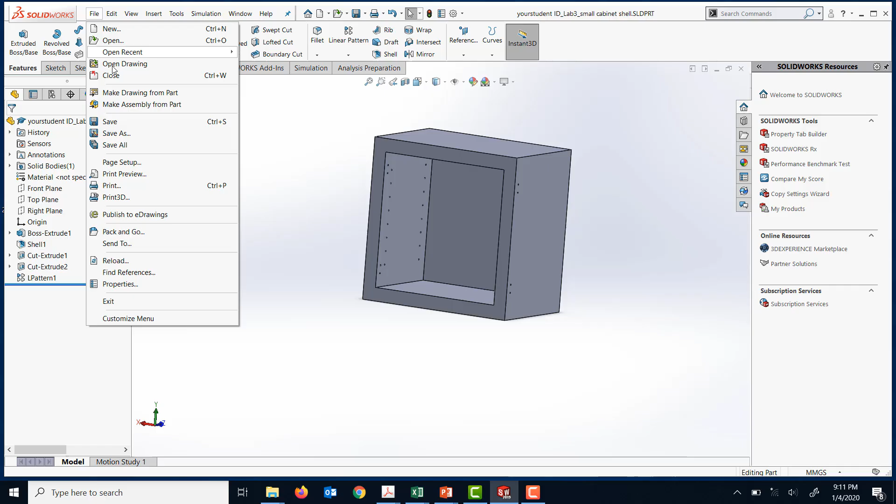Okay, now I will start working on your cabinet shelf support. To do that, I'm going to save this file first, then open up a new document part, set the units as mmgs, and save this part. I'm going to name this part cabinet shelf support.

Okay, so I'm gonna create this part. I'm gonna start again with the top plane, look normal to it by right clicking on it, click on sketch, and draw a sketch slightly different this time. I'm gonna use one of the corner rectangle tools and go into this direction.

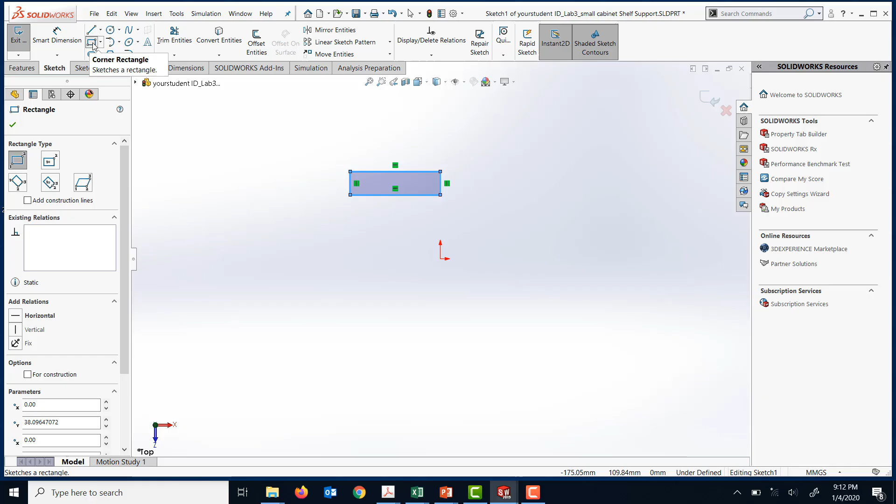Now what I'm gonna do is draw another rectangle right here, and use this trim entities, the power trim. I'm gonna click here and drag my mouse over here, and cut that from that.

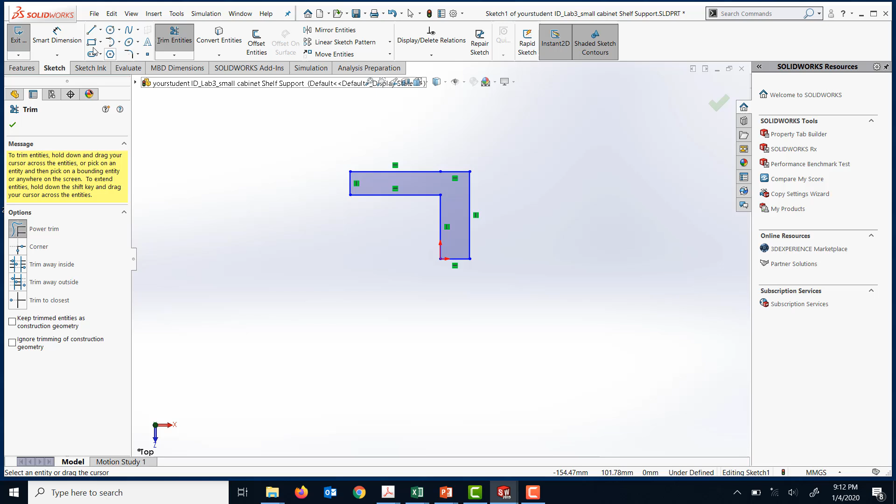Now I'm gonna add the dimensions. So this length I'm gonna set as 20, and this one as 5, this one is 5.

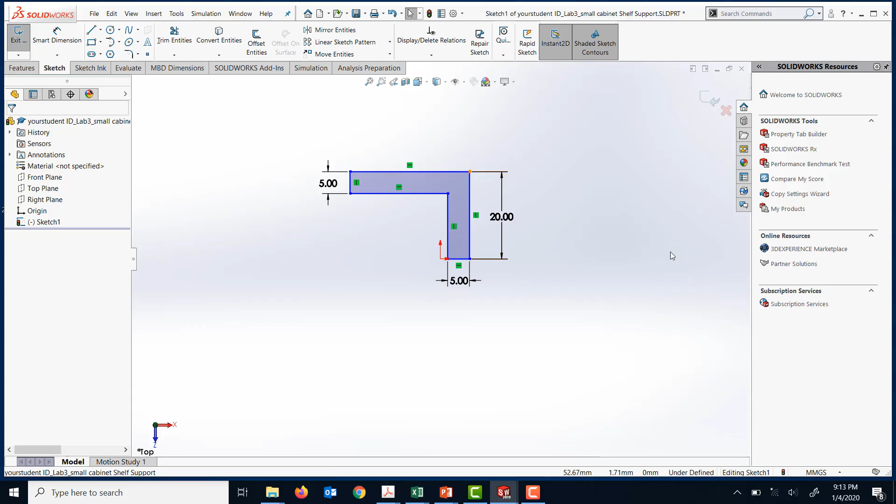What I'm gonna do is trim this one from there, and drag this point and make it coincident with that other existing point there. And now I'm gonna add the dimension there.

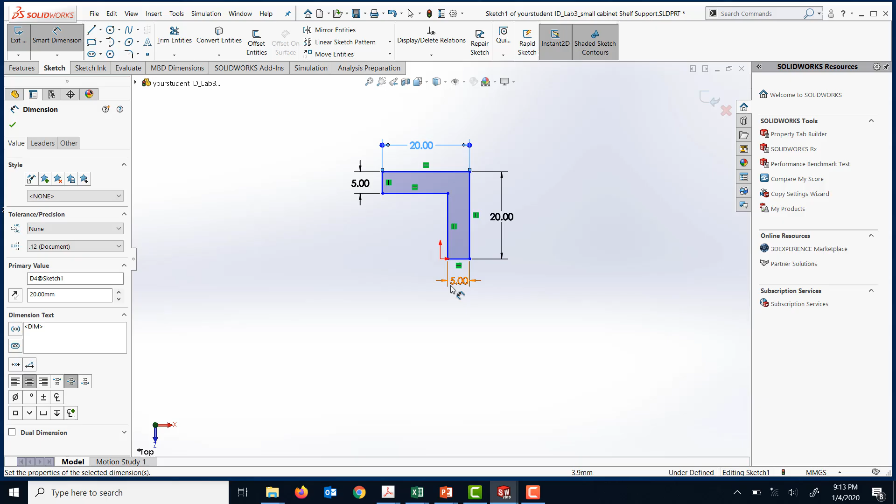This is 20, and one thing I'm gonna do is shift this point and just drag it there. So as soon as I have done it, it made this point coincident, and my sketch is fully defined. These are the dimensions that I need for that part.

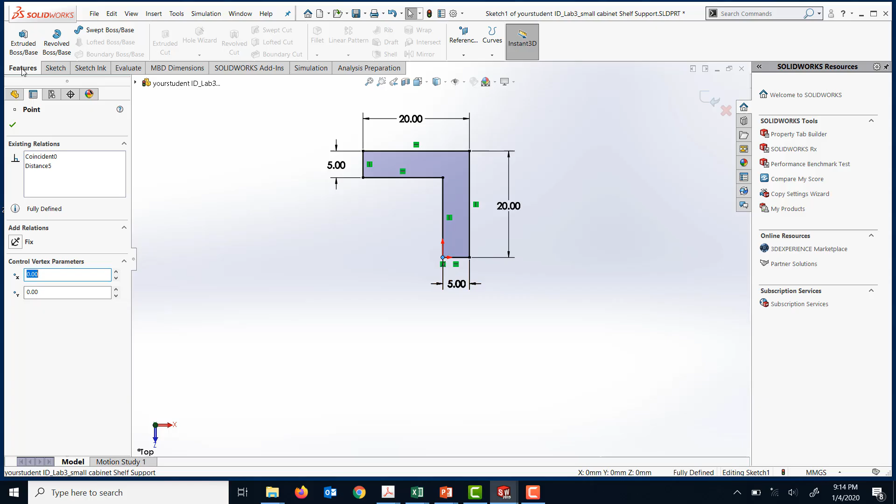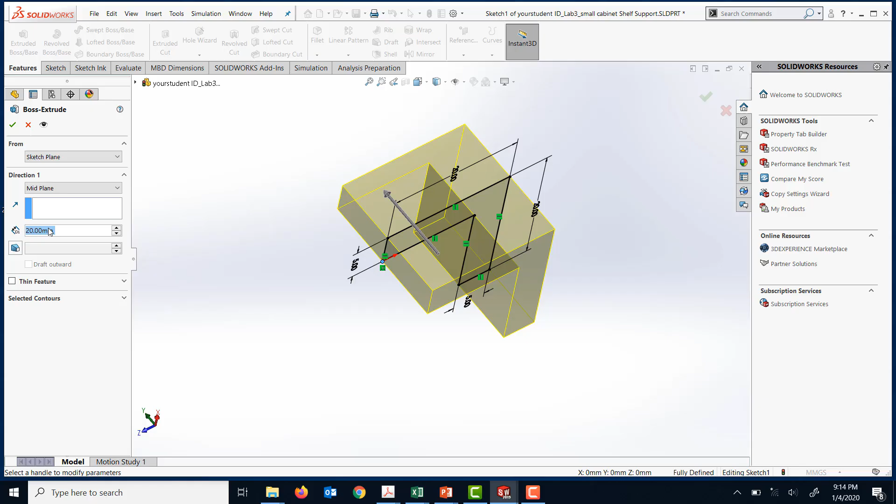And now I'm gonna go to Feature tab and do the extrusion for that. As far as the extrusion is concerned, I'm gonna do it mid-plane this time, and set the depth equal to 20 millimeters, and click OK.

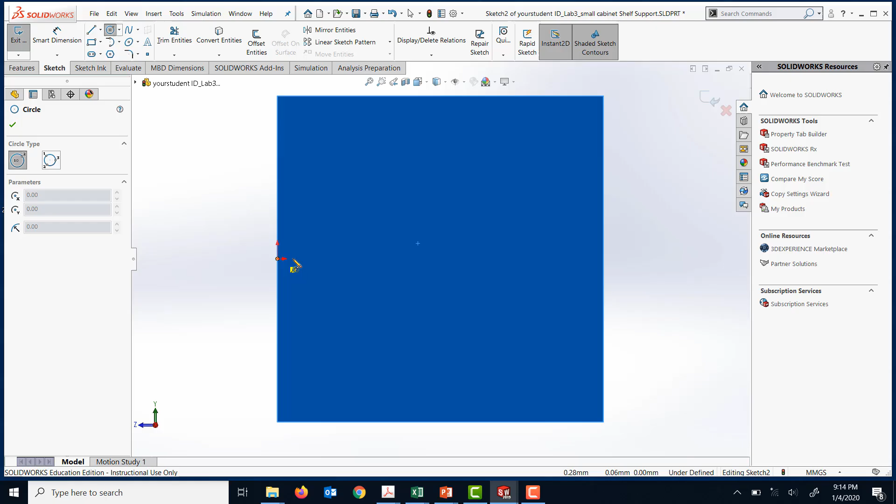So this is done. Now what I'm gonna do is add a sketch on the top of the surface. I'm gonna right click, look normal to it, go to Sketch tab, and draw a circle there, trying to come right in the middle.

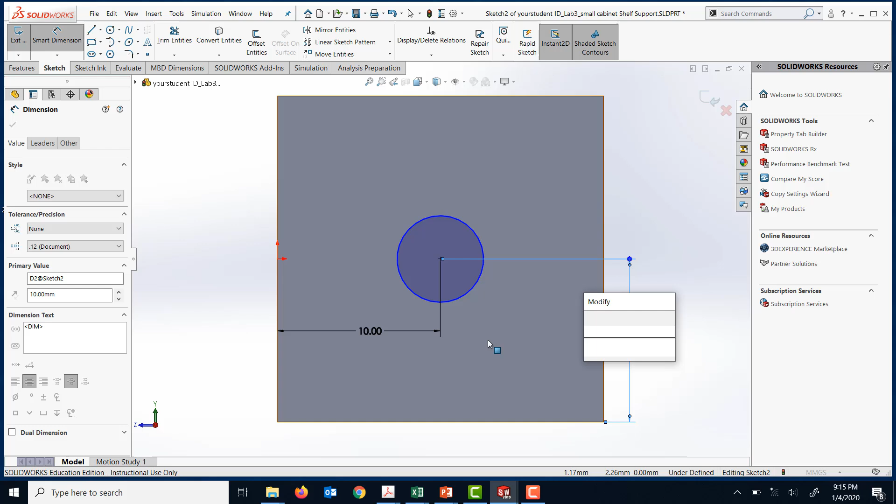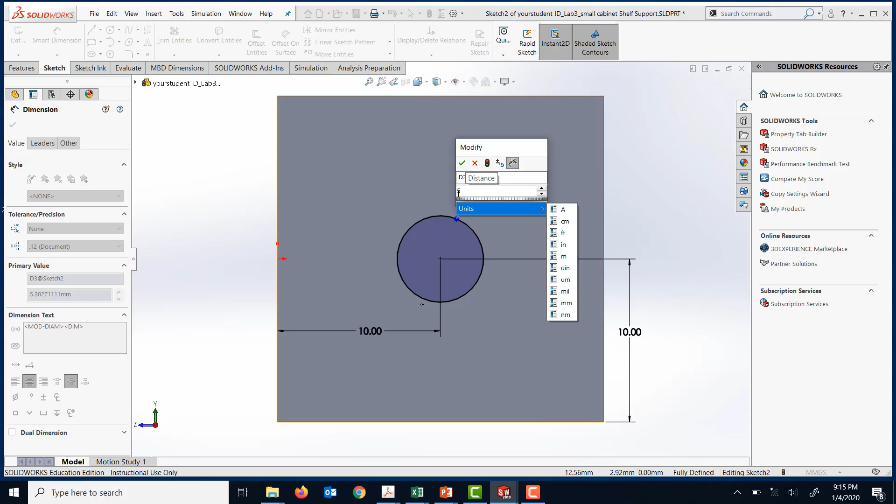I'm gonna drop this one there and start adding the dimensions. The dimension from this point to this one is 10, and from the center point to that one is 10, and the diameter for this part is 5 millimeters. I have created my sketch, and I'm gonna click OK for the dimensions. My sketch is fully defined.

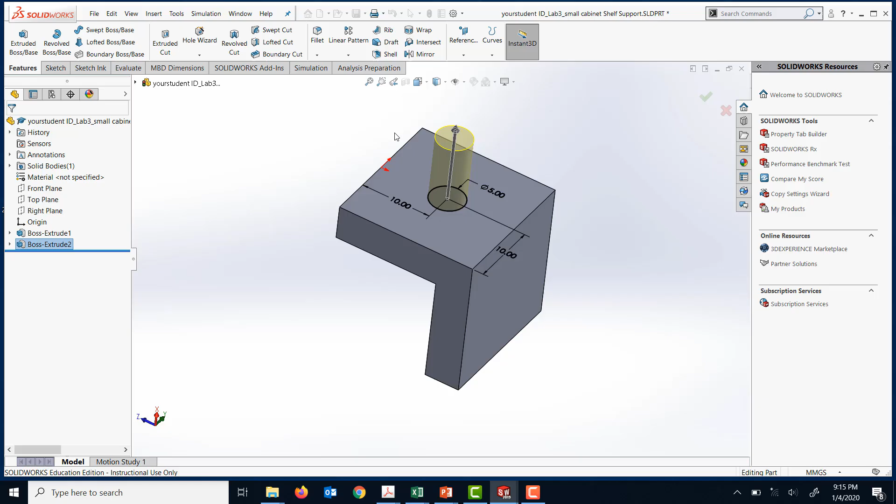I'm gonna go to Feature and extrude it by 10 millimeters. And that is done. Now I'm gonna add a fillet on this edge.

I'm gonna round it. To do that, I'm gonna go to Feature tab and click on this fillet tool icon, and select this edge, then enter the radius for that fillet equal to 2. As soon as I change it, it will show the preview with the 10 because it's bigger than the diameter, so it won't be able to round off that. And I'm gonna click OK.

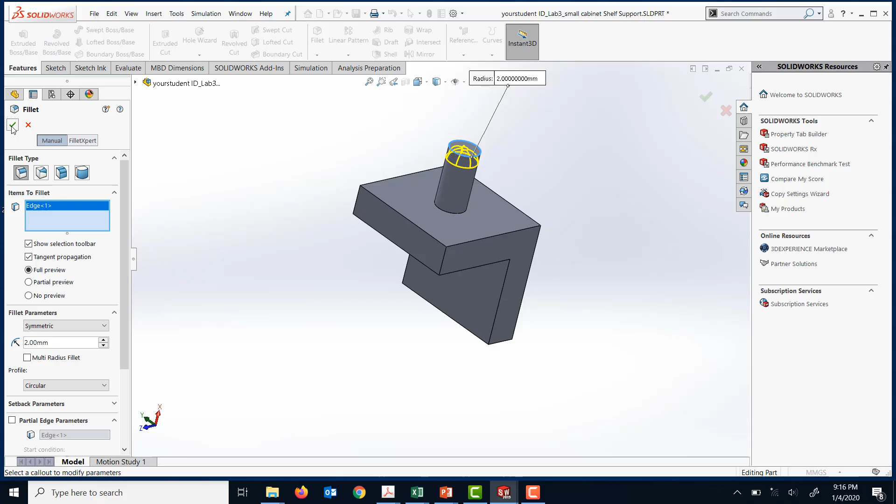So that's done. The next step I'm gonna do is use a rib feature, which is different than what I have described in the lab manual. You can follow the lab manual as well. I just wanted to introduce you to the rib feature, that's the reason I wanted to deviate from the lab manual.

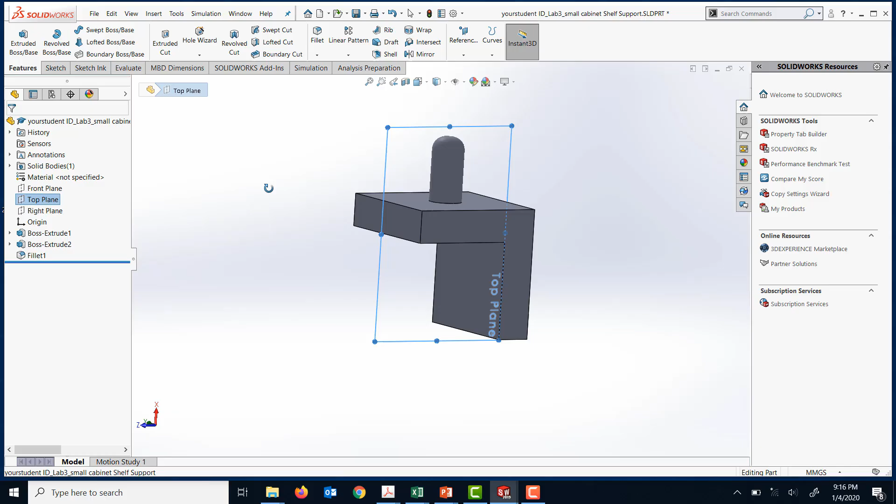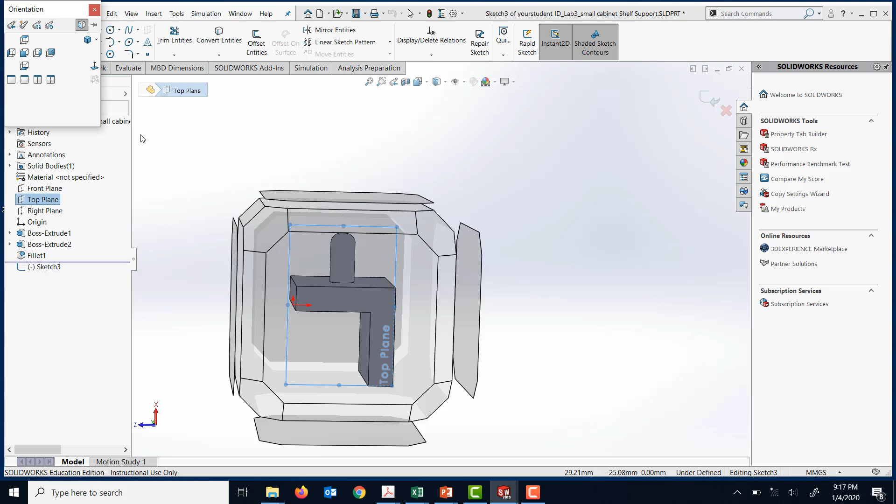So what I'm gonna do is select this top plane, and draw. I'm gonna click on the rib feature, and it's gonna prompt me. I'm gonna press spacebar key on my keyboard, and select normal to.

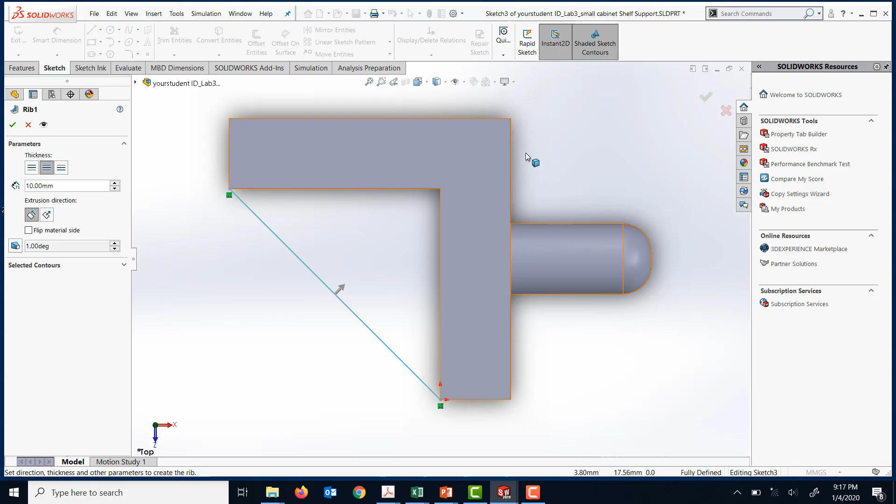Now I'm gonna go back to the sketching area, draw a line from here, and come and drop it there. I'm gonna press escape key on my keyboard and exit the sketch. As soon as I exit the sketch, as you can see, the arrow is pointed this way. It's basically the rib feature.

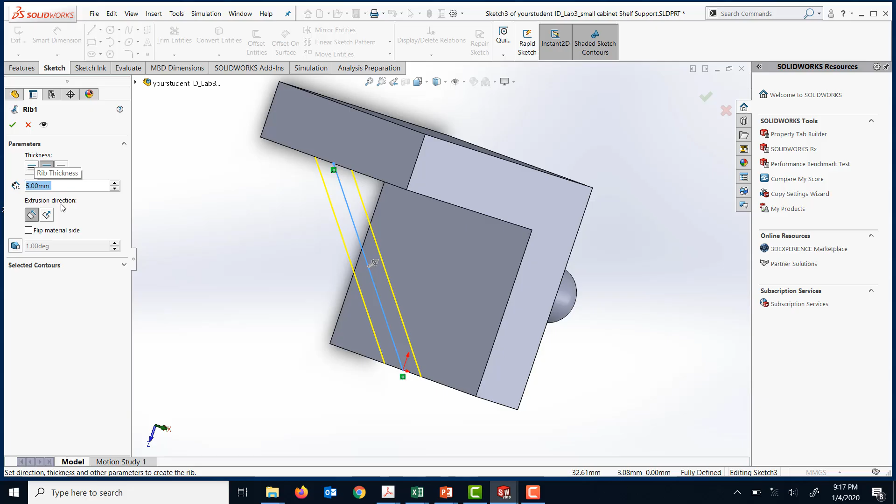The way it works is it will add material inwards or outwards depending on if there's material on the outside too. So the thickness of that rib, I'm going to specify as 5 millimeters. As soon as I enter this, I'll click OK, and my rib has been added.

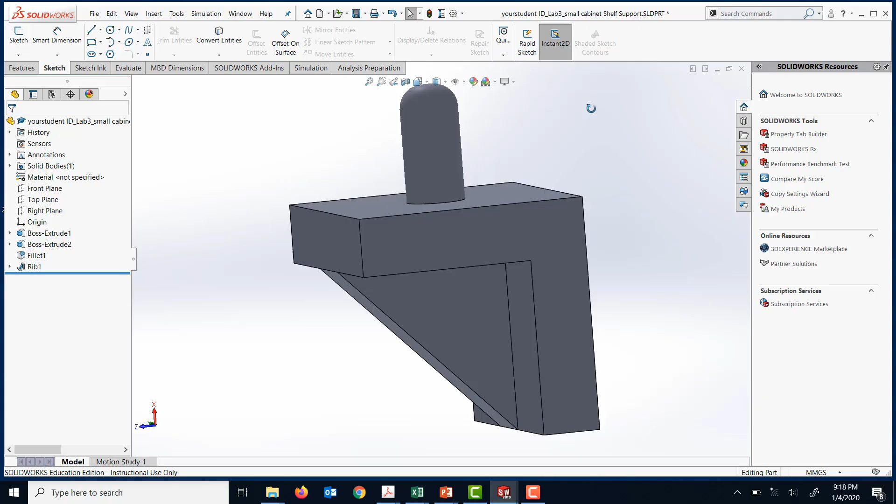So basically the rib feature is a combination of trimming using your regular extrusion process and then chamfer. Rib is basically combining that, but this is a faster way of creating it. So this completes this part.

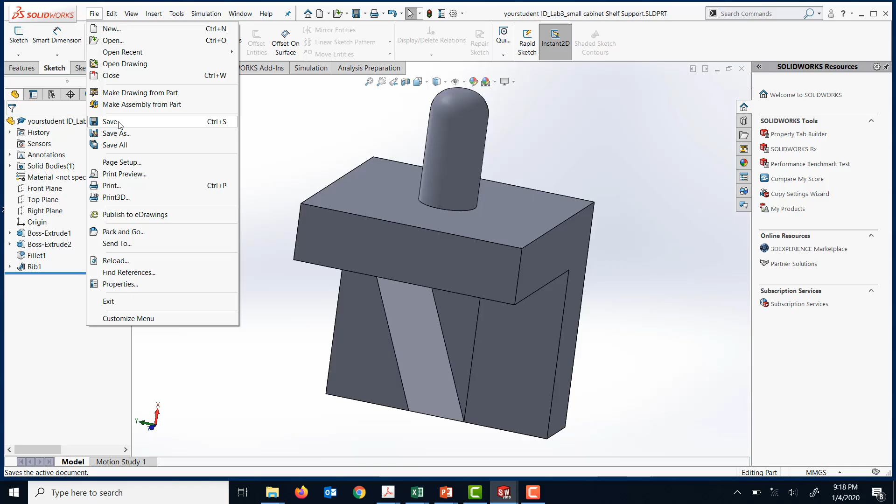I'm going to save this and carry on creating the door for this cabinet. I'll open a new part file, click OK, and now set my units to mmgs, and save this file as.

Before doing the cabinet door, I'm going to do the shelf. I'm going to remove this from there and name this part small cabinet shelf, which is different than what I'm showing in the lab manual probably, but I'll just save that as that. Please be consistent with the lab manual when you're doing it.

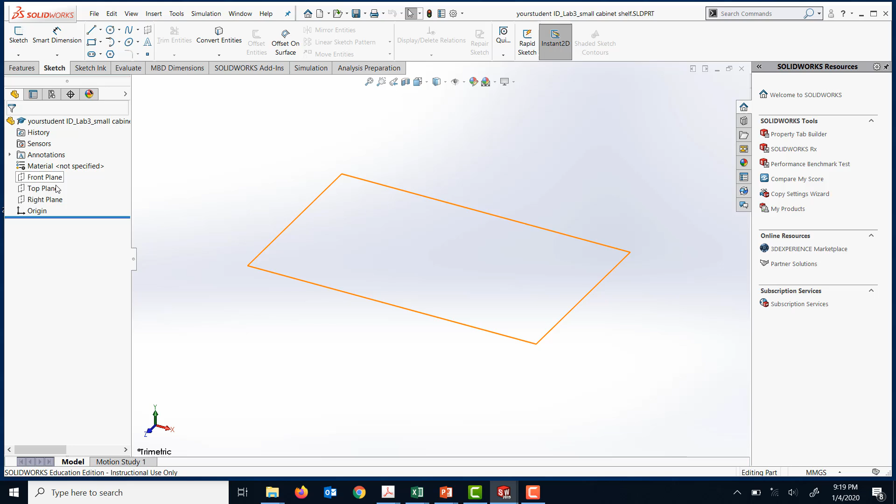Now I'm going to go to the top plane and draw. I'll use the center rectangle and drag it out by clicking here, and add the dimensions. This dimension is 350, this dimension is 500.

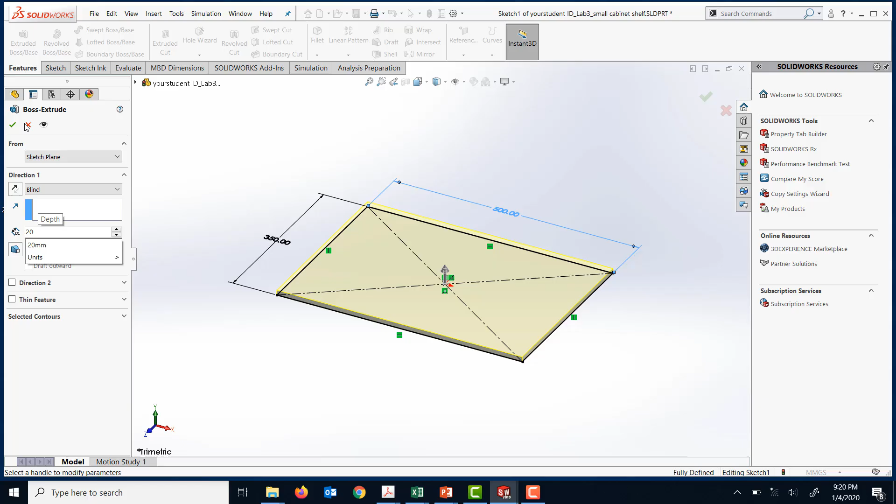Now I'm going to go to the feature tab. I'll click on extruded boss base icon, and extrude this by 20 millimeters, and click OK, and save this file. So the cabinet shelf is complete.

Now I will create the cabinet door. Again, I'm going to open a new document, part file. I'll click OK, set the units as mmgs, and now save this file as. So I already have 3 components there.

This one I'm going to call small cabinet door. This will be the fourth component associated with this lab exercise. So I'm going to go back again to the top plane, right click and look normal to it.

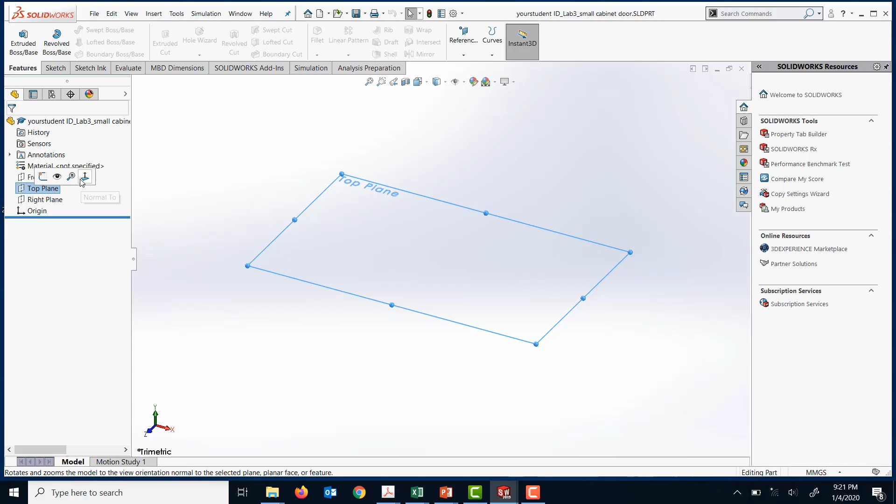I'm going to do a sketch. Again, I'll use the center rectangle, click and drag it out, then click again. Now I'm going to add the dimensions. The dimension for this one is 300, this dimension is 600.

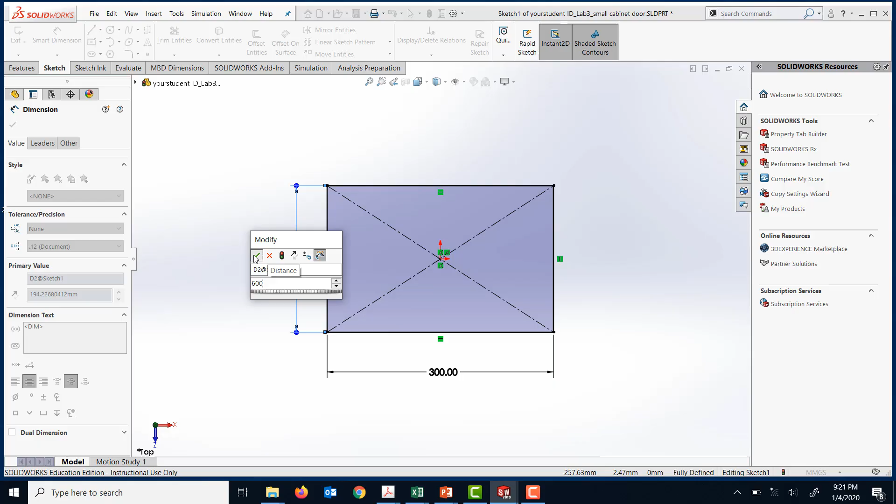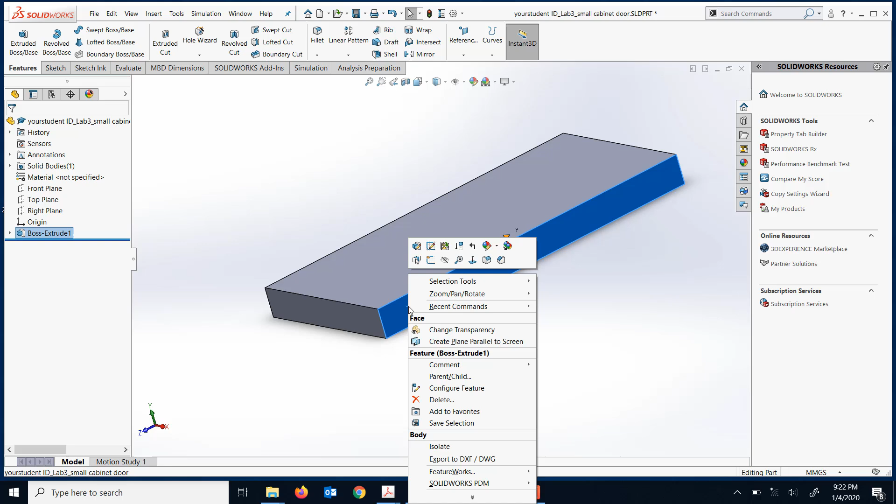Then I'm going to press the F key to zoom out, go to the feature tab, and extrude it by 50 millimeters. I'll click OK. Now I'm going to click on the side face, right click on it, and look normal to it. I'm going to add 4 holes there.

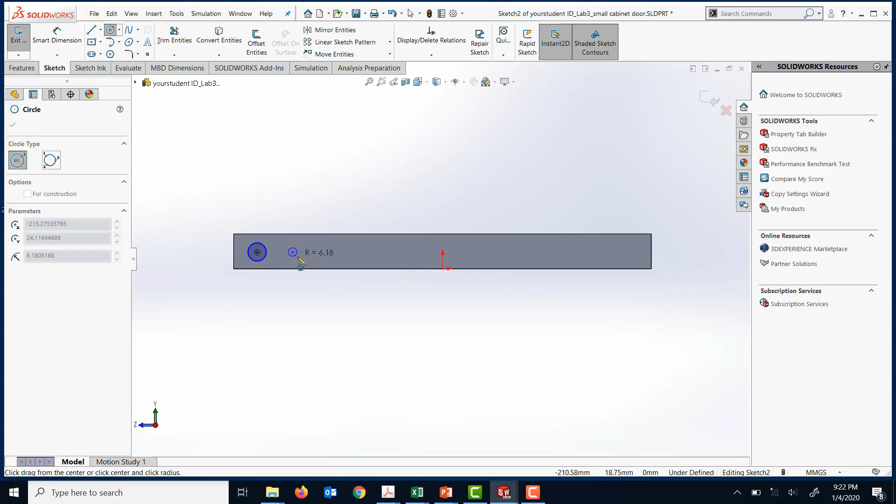Alright, let's add the sketch there. I'm going to click on sketch tab, sketch icon, and circle, and drop one here, one here, one there. I'll click OK, then press and hold the Control key and select all 4 circles.

I'm going to make them equal. I missed one. I'll add the geometric relationship to make them equal to each other, and click OK. Now I'm going to add the dimensions.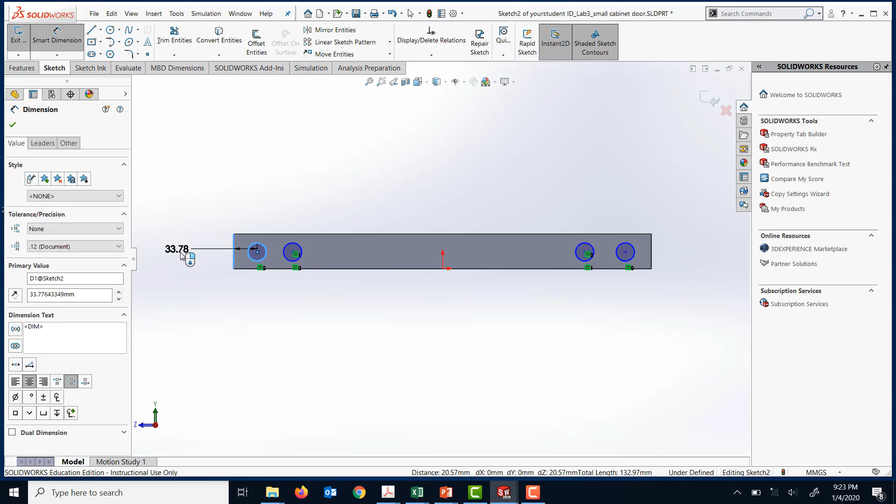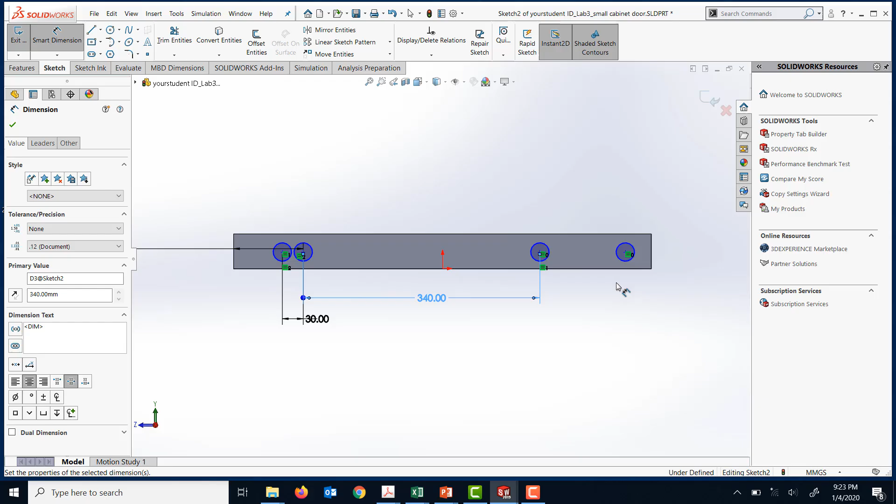Between this is 100. And between this and this is 30. Between this and this one is 340. Between this and this is again 30. And now I'm going to add the dimension for this, which is 5 millimeters.

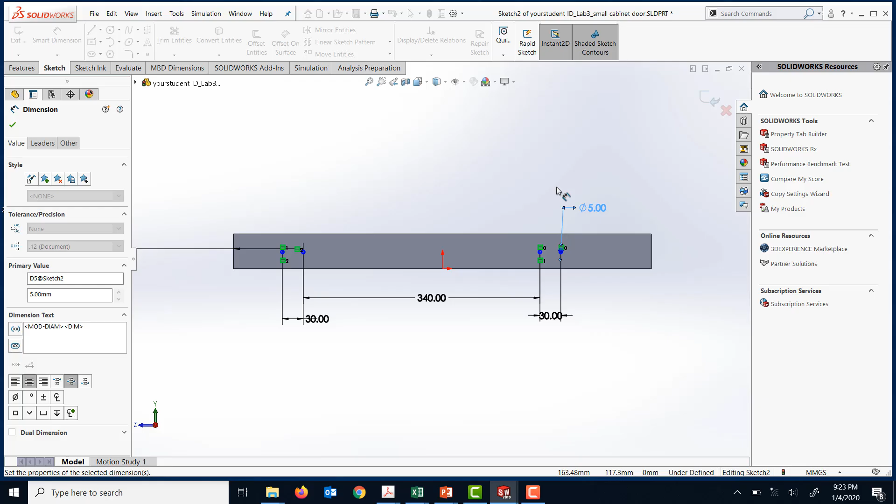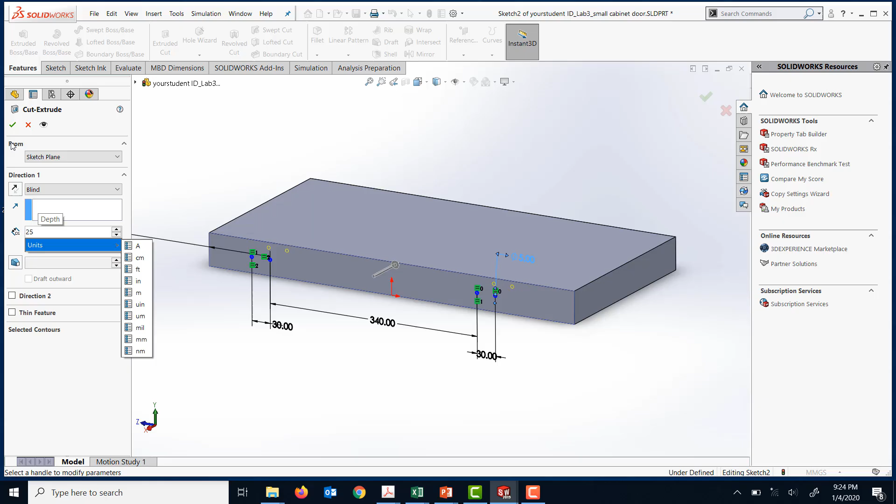Okay, now I'm going to go to the feature tab and click on extruded cut, and specify the distance for the depth of those holes as 25 millimeters, and click OK. So the holes are added, and this completes the lab door.

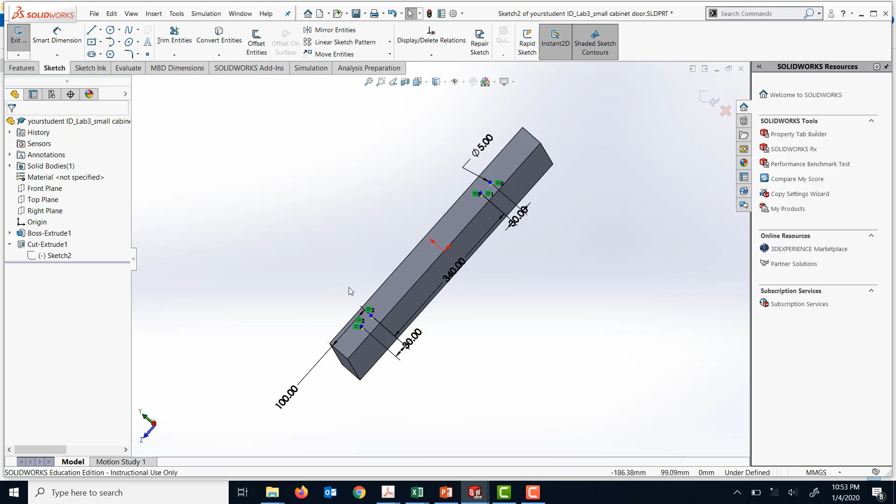Just looking at the position of these holes, I'm noticing I haven't entered one of the dimensions correctly, so I'm going to make a change to that right now. I'll go back to edit sketch and check the dimensions. Actually, this is the dimension which is incorrect - from this edge to this hole, this circle's center point distance should be 130.

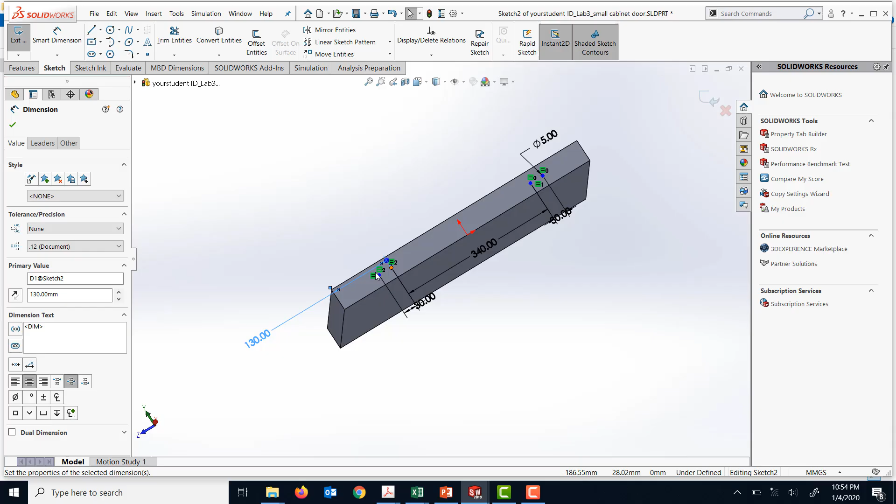This is 130, and the reason I picked this... I think I selected the wrong circle when I entered, so let me double check by selecting between this. Actually this is 100, that's what it specifies in your lab manual.

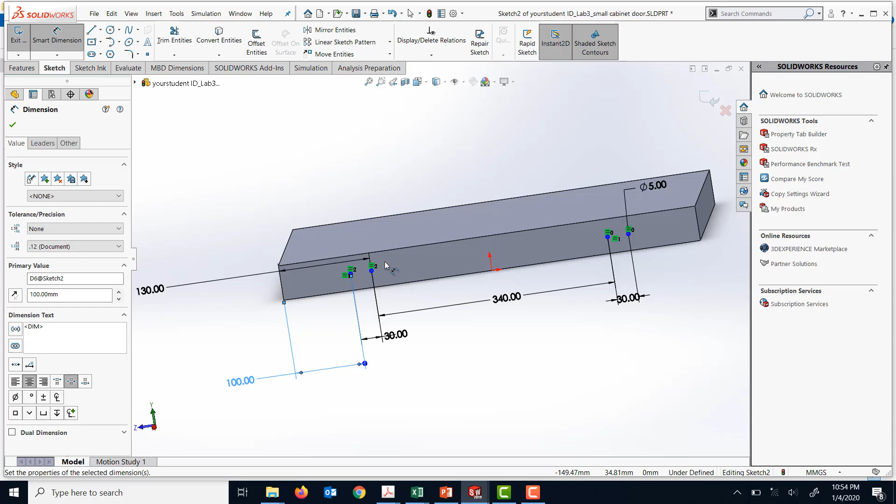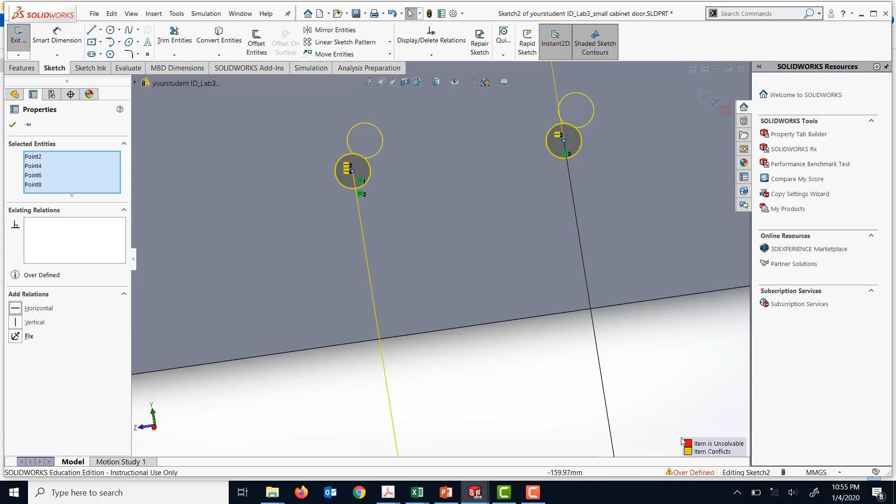Another thing I haven't done properly for this part is that my sketch is underdefined, so I need to properly define this sketch. To do that, I'm going to get out of this smart dimension, select this part, select this point, zoom in, select this center point, and select this center point, and make them horizontal. This is over defining the sketch.

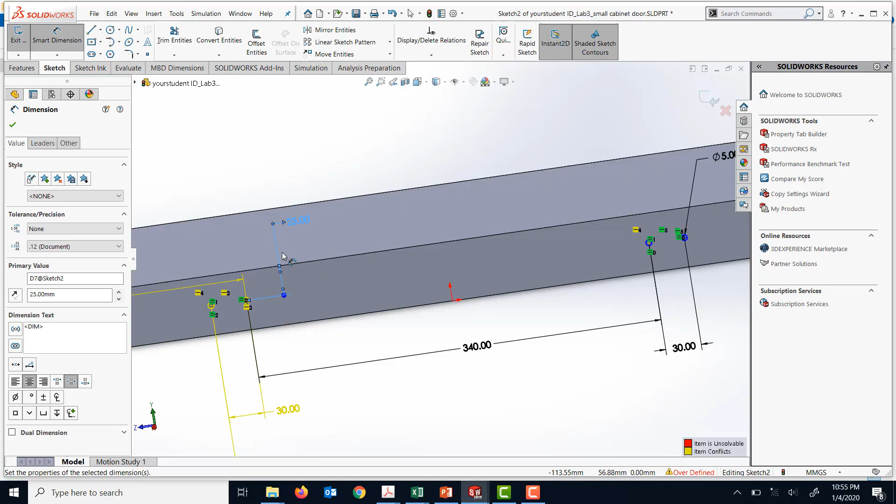That's okay. What I'm going to do is add a dimension here, select one of the things, and this needs to be 25 millimeters. If I want to get out of this overdefined sketch, I'm going to just delete this because that dimension wasn't needed. Now all the dimensions are according to the lab manual.

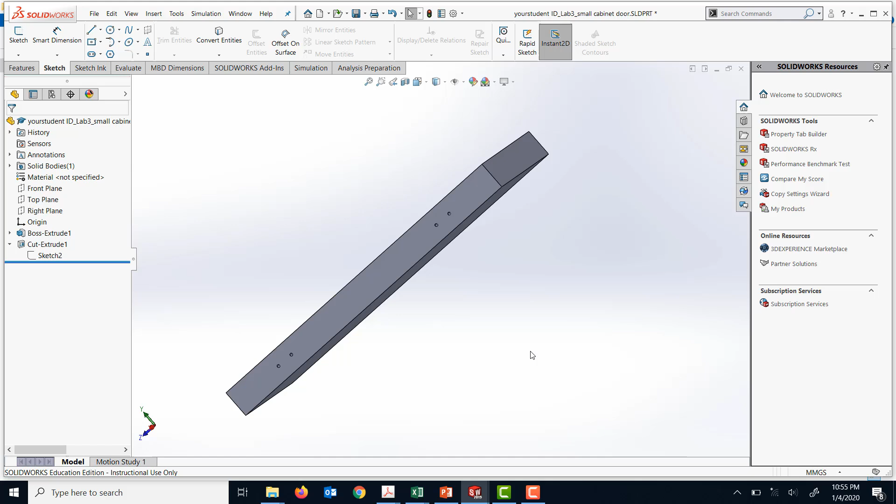So I'm going to exit this sketch. Doing so has basically adjusted the whole position, so now my door is exactly as it's described in the lab manual. I'm going to save this part, and now in the same video I'll quickly complete the last component as well.

To do that, I'm going to open a new file, click part, click OK, set the unit as mmgs, and save this file as... I'm going to call this part flat bracket for 2 cabinets assembly.

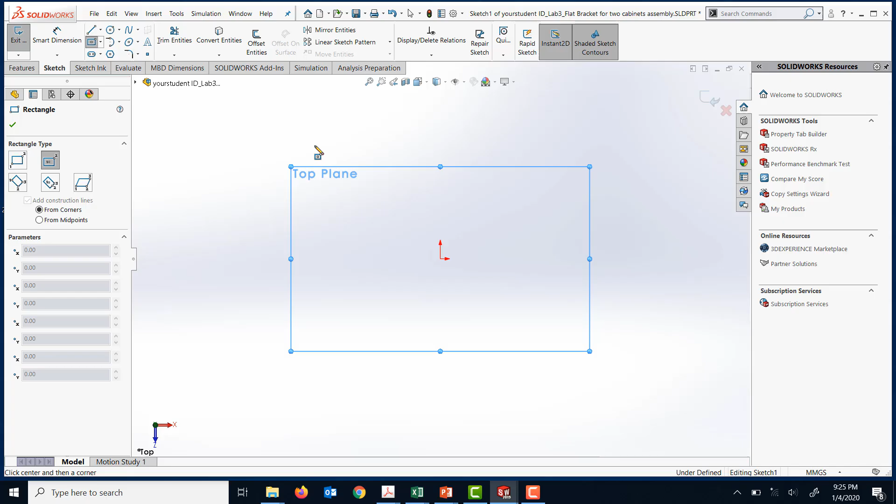Okay, to do that, again I'm going to go to the top plane, look normal to it, and go to the sketch icon and click on that. I'm going to add a center rectangle again, start at the middle, and move it out.

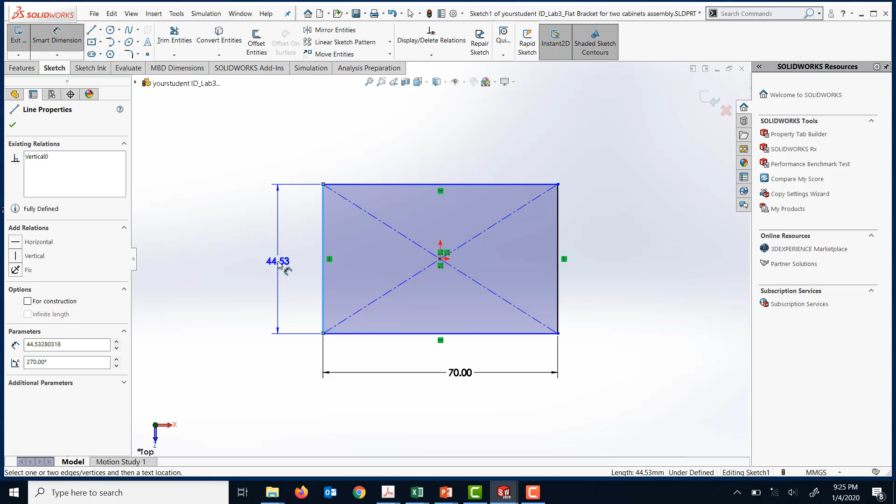So I have the coincident relationships there. Now I'm going to add the dimensions. The dimensions are as follows: this dimension is 70 millimeters, this dimension is 90.

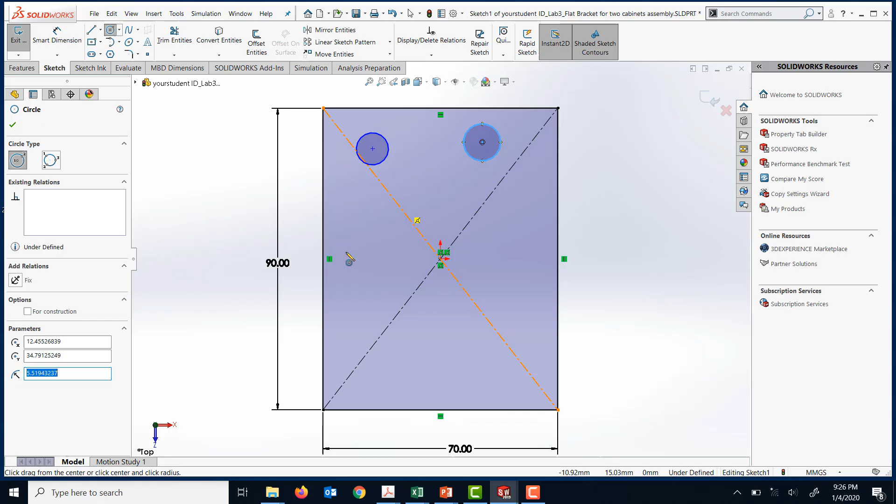And at the same time, I'm going to add 4 holes, 4 circles in there. I'm just going to click on the circle and basically drop one there, one there, one there, and one there.

And I'm going to add some dimensions. From this edge to the center point of this arc is located at 20 millimeters, and the same thing from here to here is 30 millimeters. From here to here is 20 millimeters, and from here to the center one is 50.

Now I'm going to add a couple of geometric relationships between them. First, I'm going to press the Control key and hold it, select this, this, this, and this, and make them equal.

Click OK. Now I'm going to grab this center point and hold Control key, and this center point and Control key. Between those 2 points, I'm going to add a vertical relationship so they're lined up vertically. Click OK, and repeat the same thing for this one and this one while holding down the Control key, making them vertical so they're shifted, defining, fully defining my sketch, and click OK.

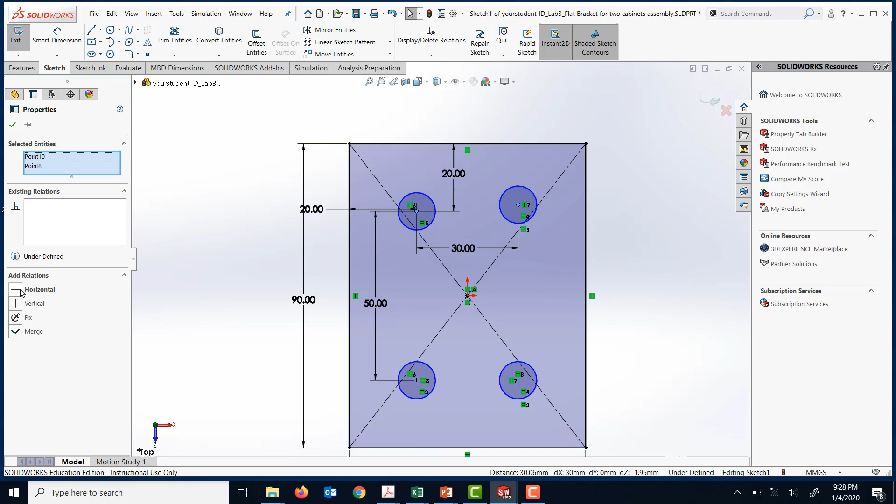Now between this point and this point, I'm going to make them horizontal, click OK. And this point and this point, selecting them by holding Control key, I'm going to make them horizontal. As soon as I do that, the only relationship I really need to define is the dimension for this hole. I'll set the diameter as 5 millimeters. As soon as I do that, I have fully defined my sketch because all the features are fully defined. Now I'm going to exit the smart dimension.

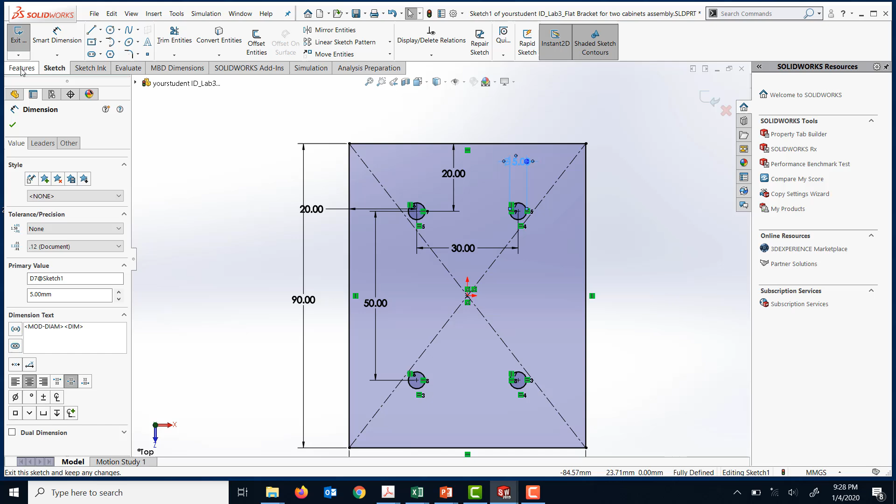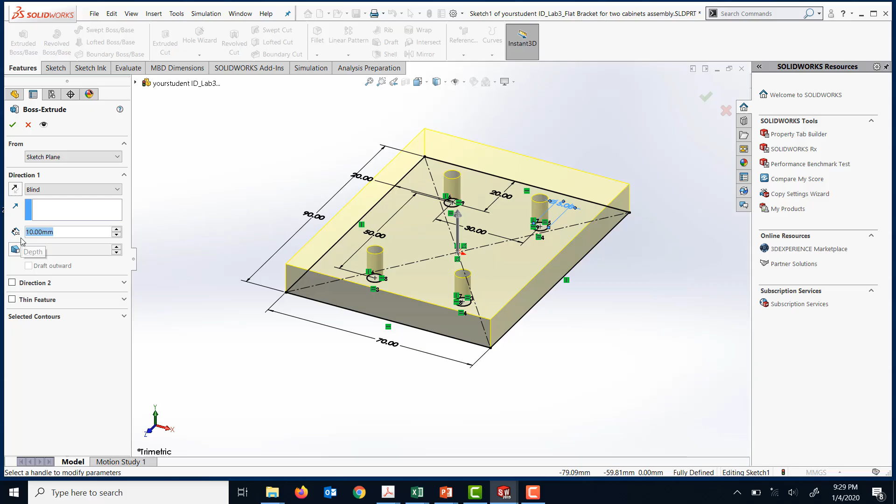I'm going to click on the feature tab and do an extrusion. I'm doing the extruded boss base, and wherever I created those circles, it is basically creating the holes. The thickness of this part is 2 millimeters. I'm going to click OK. So basically, this completes all the parts associated with your lab 3A. I'm going to save this document and stop this video.